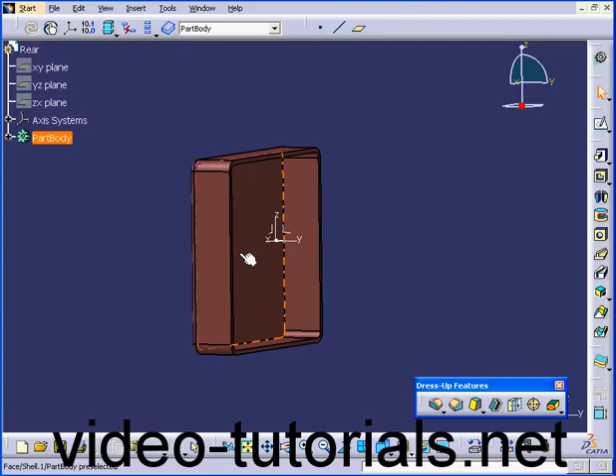What I want to do is create openings between these two boxes. Right about here. Let's select Window, switch back to the front part. I'm going to create what's known as a removal solid.

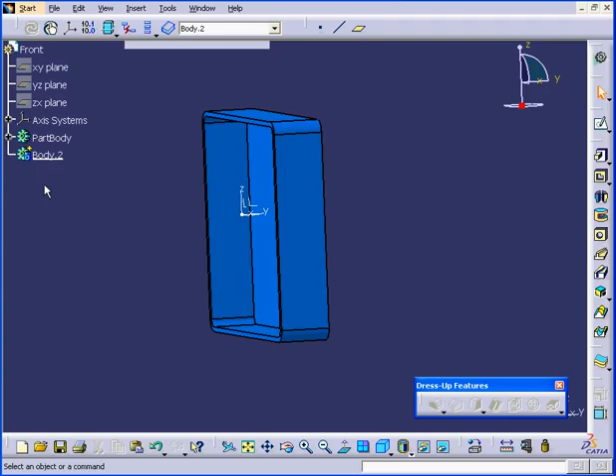The first thing to do is insert a body. Insert, Body. When this body is underlined in the specification tree, that means it's defined as an in-work object. Let's activate the Sketch command. Select this face.

Now the Rectangle tool. Let's drop a rectangle right about here. Dimension it.

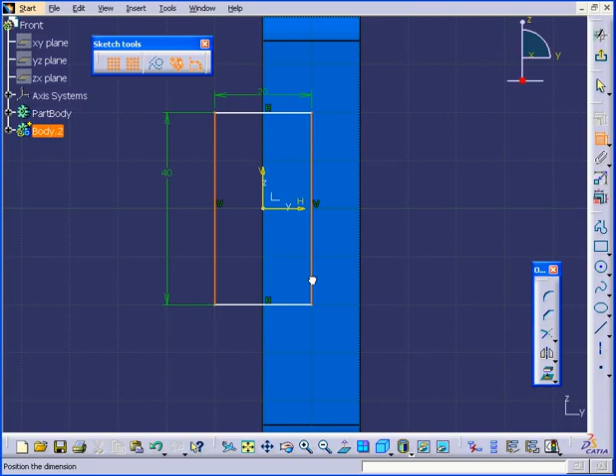Actually, I want these openings to be in the middle. I'm going to dimension them from this edge. And the last dimension here from the top. We want these openings to be in the middle, so let's make the dimensions driven by formula.

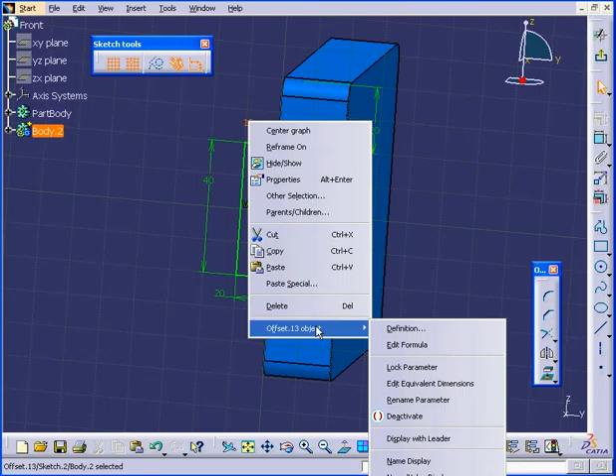Right-click, Offset 13, Edit Formula. It's going to be equal to this dimension, divided by 2. Click OK. And exit the sketch.

Now activate the Pocket command. Under Dimension Type, let's choose Up to Plane. Even though we have the Up to Next option available, it won't work because this is a different body. And this is the first feature in that body.

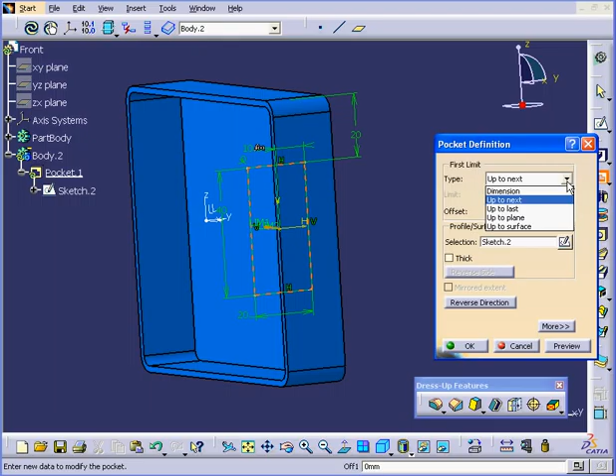Let me just demonstrate. If I click Up to Next, CATIA gives me a warning. That's why we'll use Up to Plane instead. For the limit, I'll select this face and click OK.

Even though this feature looks like a solid, it's actually a pocket. And here we see the pocket icon. When we perform a Boolean operation or assemble these two part bodies, they'll become one whole or a removal solid.

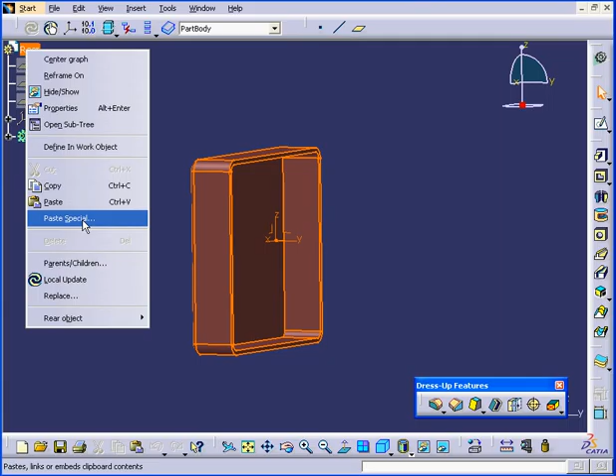Okay, let's move on. At this point, we are going to right-click, copy, and go to the rear cover of the box. Now let's right-click, paste special. Let's paste as a result with link. Click OK. We've got Part Body 2 pasted right here.

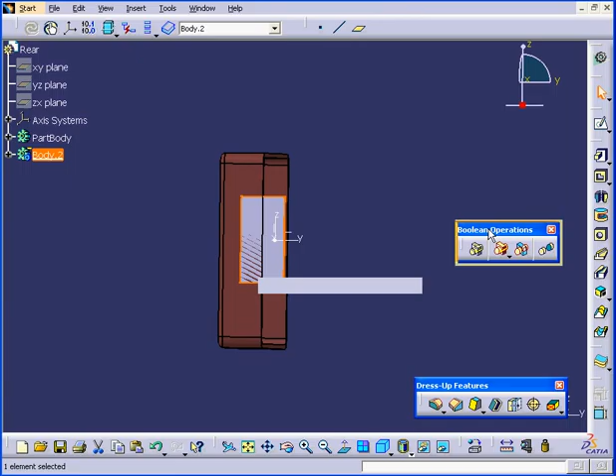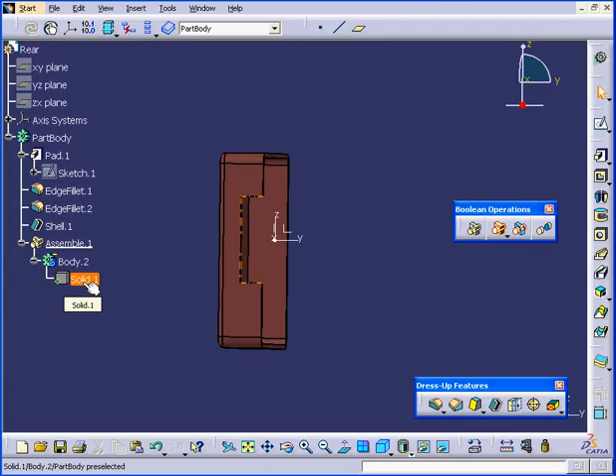Next, select View, Toolbars, Boolean Operations. With Body 2 selected, let's click Assemble. Body to assemble to the part body, and this feature will be added after Shell 1. Click OK. If I expand Body 2, I've got no way to make modifications. It's an imported solid.

Let's go back to our front cover. We're going to perform the same operation here. Assemble Body 2 to Part Body. Click OK.

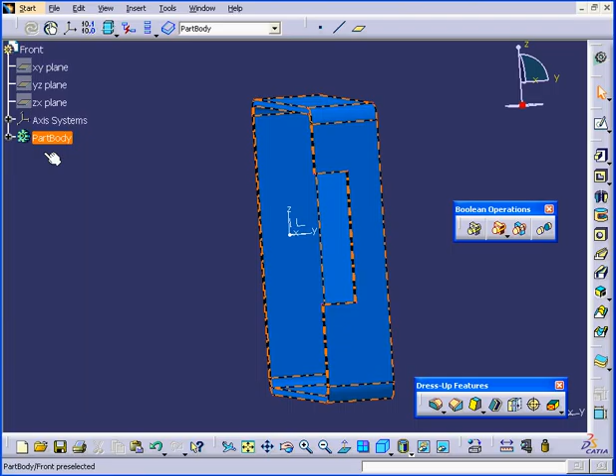Now let's go ahead and edit the sketch. Double-click on the sketch to open it. Remember, this dimension is driven by this dimension. When I double-click on the dimension, I'm not able to make edits. Let's cancel. I'm going to double-click and enter a value of 10 millimeters here. Tab, and OK.

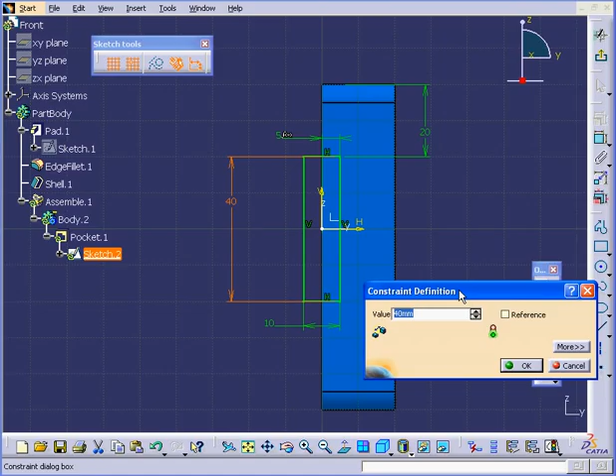Let's also change this value to 25 millimeters. Tab, and OK. Let's exit the sketch. Obviously, we see some changes here.

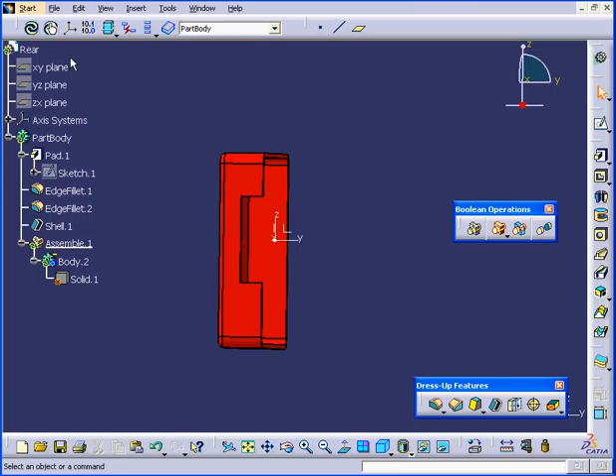Let's go to our second document now. We need to update this document. It's red in color. Let's click Update. We see the openings here have changed as well.

If we select Edit, Links, we see the new pointed document right here. Click OK. And this concludes our tutorial on the Removal Solid command.